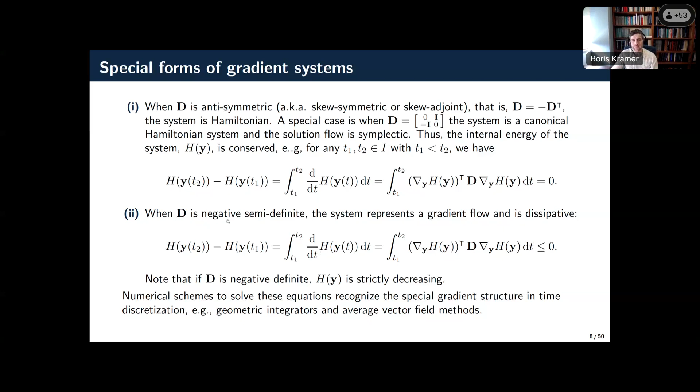If D happens to be negative semi-definite or negative definite, then you have a gradient flow system, and you have a dissipation. So the energy at T2 minus the energy at T1 would be less than zero. So the system dissipates energy. In numerical schemes, if you want to do just PDE discretization, they would respect this, and we want to respect these properties in reduced order data-driven modeling.

So let's focus in this talk on canonical Hamiltonian systems, just for the purpose of the first 10 slides. In canonical systems, I can separate the state into two distinct physically interpretable quantities, the momentum and the generalized momentum. The matrix that's in front of the gradient of the Hamiltonian is the simple canonical Hamiltonian structure. It looks like the identity minus the identity on the off-diagonal. And lastly, there's a symmetry that we can often use in the full order model operators that arises from space discretization. If you're interested in other gradient systems, then you should look at this. If you're interested specifically in non-canonical Hamiltonian systems, then Anthony Gruber and Irina, who I think is on this call, have done some work in this area to do learning of these systems.

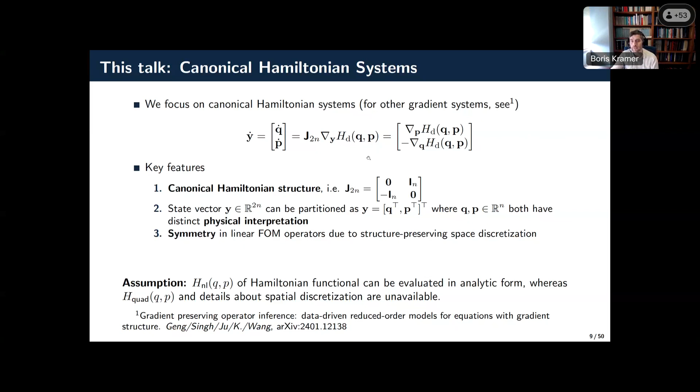So in the canonical case, I would basically like to learn a system of the top part that looks like Q dot, P dot is equal to that, but I'd like to reduce the dimensionality first. I don't want to learn in 1,000 dimensions. So to do that, I assume I have data. I store snapshots of full order simulations in the matrix Q and P just to separate these physical quantities. We'll relax assumptions as we get further into the talk. In this first part, I'm assuming that I know something about the nonlinearity in the functional. So I know something at the PDE level. I do not have to know this at the code level, but I have to know it at the PDE level. If I know this, then I can evaluate non-quadratic terms on my state.

So I can build these forcing matrices, both for a momentum and a generalized momentum. And I can also build time derivatives with, for example, a finite differencing scheme. If I have noisy data, then maybe I have to do something else, total variation differentiation or something else. But what I do here is I store data, I evaluate something that I know at the PDE level, and I compute time derivatives. Now I have to reduce my dimensionality because n could still be in the thousands or 10,000s or 100,000s. To do this, we have to be a little bit more careful.

So we want to use proper symplectic decomposition that was proposed in this paper by Peng and Mohseni in 2016. So basically, you want to make sure that the projection is onto the right space so that this projected dynamics can still be evolving in a symplectic flow. So here, the way to do this is you basically compute this phi matrix.

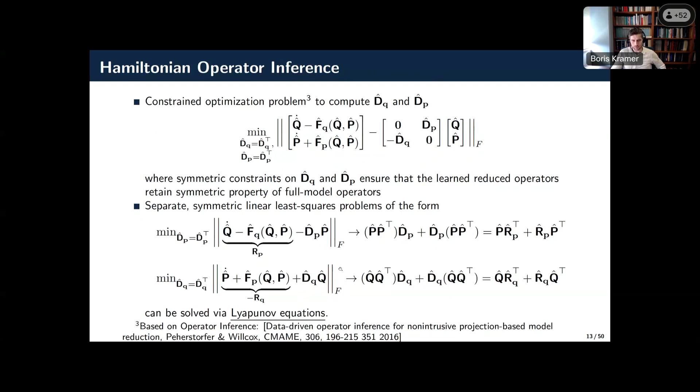Okay, so now we have a few operators, and what we basically have now is a reduced order model. We have learned these operators hat, and we have a reduced order model that evolves the reduced states with these symmetric matrices in linear terms. We studied this for a little bit in terms of what we can say.

So if you had done reduced order modeling, which is often projection based, if you had done this in a Galerkin projection framework, so you take your PDE, you discretize it in space, and you have reduced spaces that you want to project it on. So if you had done this, would the learned model from the least squares problem be close to the projected model if you had done everything intrusively?

And while it's not a result that has a pre-asymptotic error bound, at least it tells us that the operators that you get from projection, which we call tilde operators, are close to the operators that we get from learning by epsilon. So for every epsilon, you can find an R that satisfies this. The unsatisfactory thing about this result is that we don't quite know how epsilon depends on R. But anyway, asymptotically, we have this result that at least we learn the right operators.

Very recently, we also looked a little bit at the error that this implies on the solution. So if you were to solve your full order system from 0 to t, and you solve your reduced system from 0 to t, and you inject this reduced state back into the full state with your matrix phi, then you can bound this error by using some Gronwall inequalities as follows.

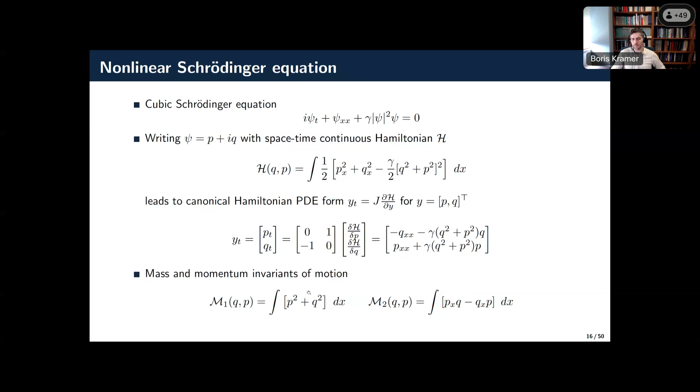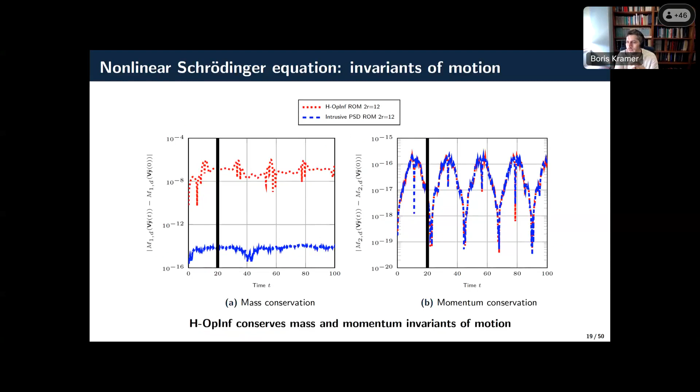So now we focus on Lagrangian models. They have structures as well. And again, methodologically, this is based on the work that Harsh has done, and then we'll see several extensions and actually nice applications. So why is Lagrangian structure now important? Why is that something we should focus on?

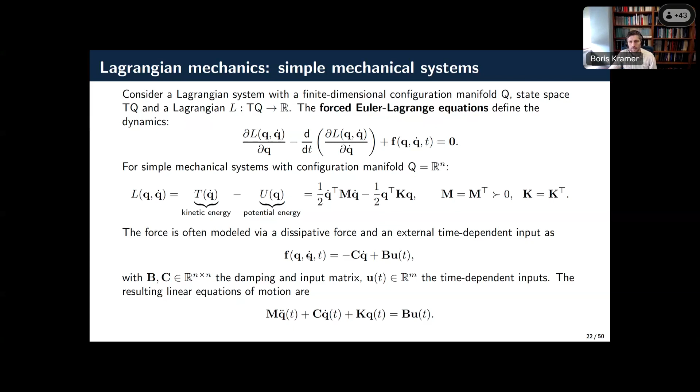I can expand and also use this Euler-Lagrange principle to look at nonlinear wave equations. So now I'm going one level up, so I'll go to the PDE. So what if I have a wave type equation? So second order in time, one-dimensional in space, where I have some nonlinear terms.

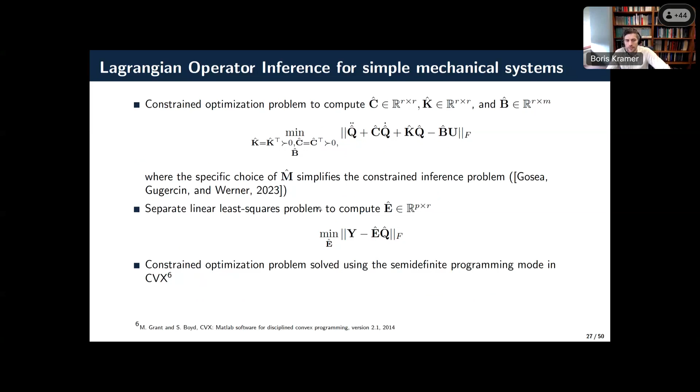And now we're moving pretty much like before. We set up a constrained optimization problem where we have constraints on K and C to be symmetric positive definite. And things that we have pre-computed and obtained from the data are Q double dot, Q dot, Q, and U. We know what inputs we have. And then lastly, we could learn the output matrix E hat if we wanted to. We solve these things with the CVX toolbox. So we minimize this problem under constraints.

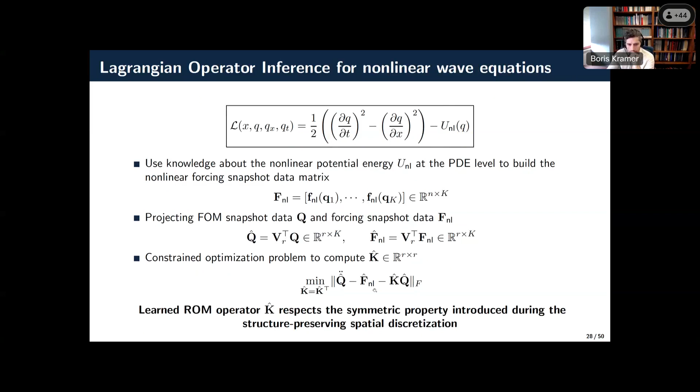If you want to push it to a nonlinear wave equation, so if you want to add some nonlinearity here, then at this point, again, we'll relax this at the next level. We would have to know this component of potential energy at the PDE level. If we do this, then we can evaluate that nonlinearity at the state. We make the same projection, and we solve our optimization problem again. We'll see some results for this later. Importantly, I think really the symmetry and positive definiteness is what gives us long-term predictive accuracy.

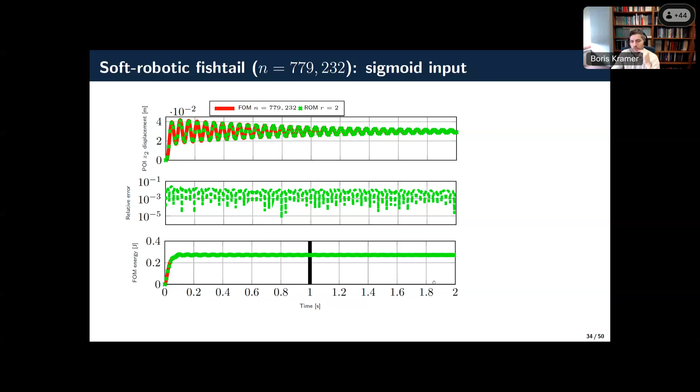We have this displacement, and we show it for the high dimensional problem, and we show it for a reduced order model of dimension 2. That's pretty good. Other people have also worked, a group of Peter Benner, Stefan Werner has worked on this with different reduced order models. This is a nicely reducible problem. Relative errors are low, and the energy, most importantly, here we train for 1 second, extrapolated 2. You see the energy doesn't change anymore because we have a nicely predictive model.

Now we use a step input. So this is a control in. So we trained it with a sigmoid. Now we tested with a step. They have very different characteristics and frequencies that they excite. So even for different inputs, this works pretty well.

We now see the step response of the full order model and of the two different reduced order models, intrusive and non-intrusive. The displacement errors are probably better here to see than to compare all these circles and dots. And lastly, the FOM energy in both cases remains very nice and stable. So no energy growth or anything.

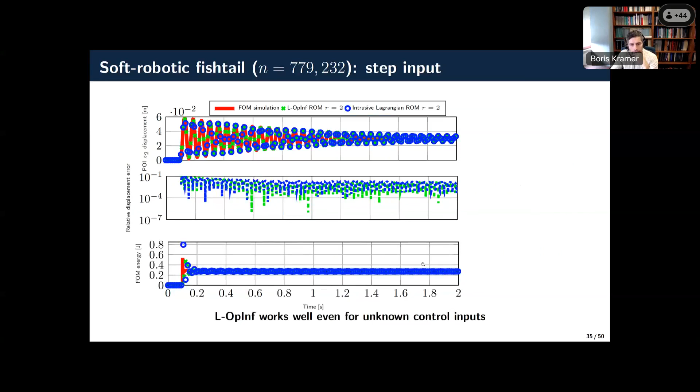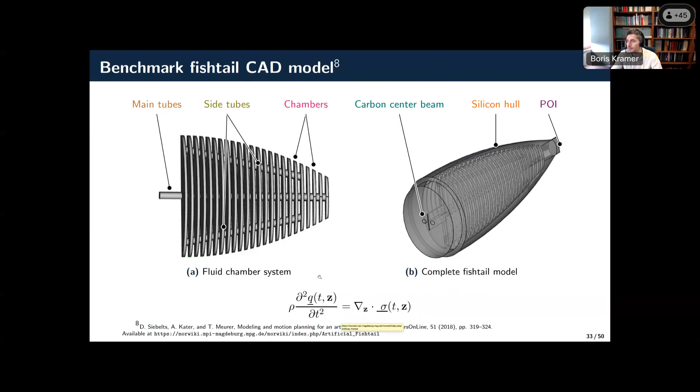Okay, so that was our benchmark problem. And by the way, you can download it. This is really nice. Peter Benner's group has the MORwiki up, so you can download this model if you want to and play around with whatever method you have. Okay, so this was a benchmark model. And then some of our colleagues here in the robotics group at UCSD got interested in this, and so now I'm just showing you 5 slides or so about actually building something like this here at UCSD.

So here I have some videos. I hope they're playing. Youngsoo assured me they would be playing. On the left side, I'm showing you a video of a trout that's swimming. So this is an actual experiment where you have a water tank, you have a stream. So why do fish swim up the stream? And you have this trout swimming. So let me go. Oh, no, it doesn't. Let me see. I'll show it again.

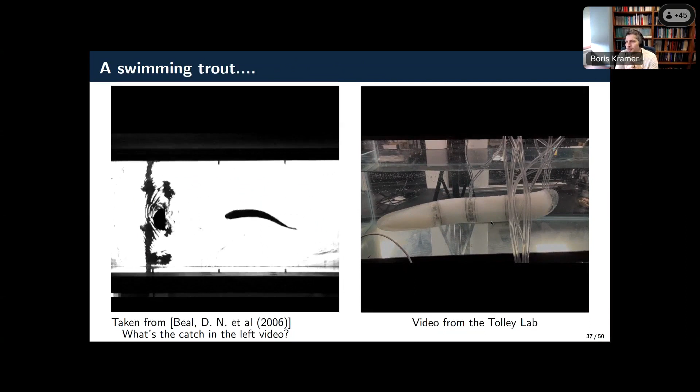So focus on the left video. Can someone tell me what's the catch of this left video? If someone has seen it, you will know it. If you haven't seen it, you won't know it. Or maybe make a guess. The fish isn't alive. The fish is not alive. Yeah, the fish is dead.

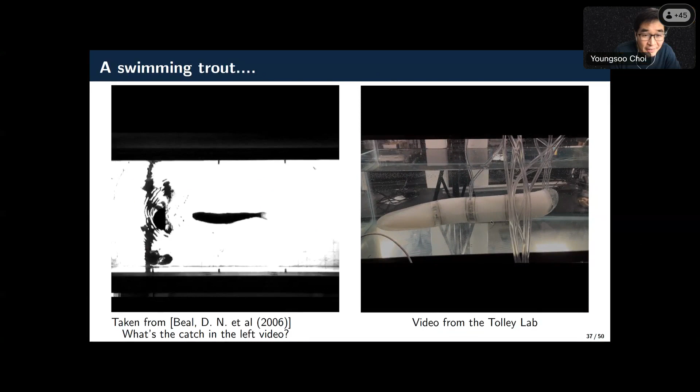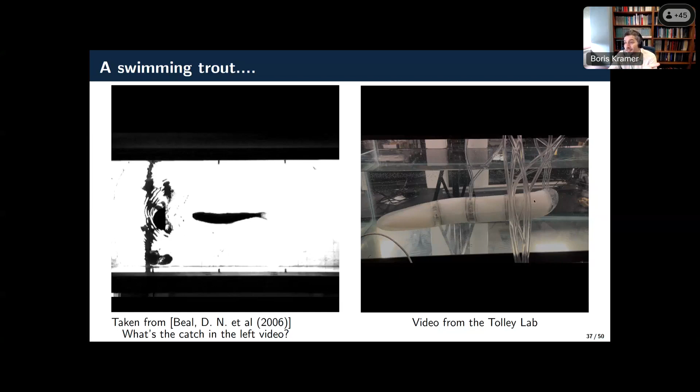Which really is interesting. They put a dead trout in there, and just the body motion and the way these fish can move allows them to swim with very low energy, like zero energy upstream. And so that's pretty impressive. Obviously, we would like to replicate this in engineering. So on the right side, you see a video that actually is from our collaborators here at UCSD, one building over. They built this soft robot.

They actuated it with these kind of pneumatic chambers where they put in pressures. So these are the control signals that you have. So you have 1, 2, 3, 4, 5, 6 control signals, I believe. Yeah, 6 controls that you can actuate. And you see this thing on the right-hand side is basically moving. Okay, so that's good. So they want to actuate this thing.

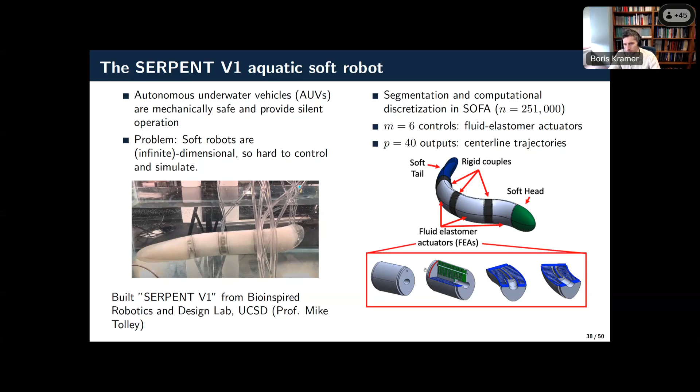This is a soft robot, so it's a continuum model. There's a discretization software that's a little tricky to use, but we've used 250,000 dimensions. The nice thing is this is typically segmented, so they produce individual segments and kind of patch them together. It's 6 controls, which are these fluid elastomer actuators. They also change the actuators all the time to get better performance, and the outputs are the centerline trajectories. And so basically this is how this looks inside the finite element model.

So now what they want to do is a control loop where you have a control policy that could be nonlinear. So it's a model predictive control, basically, MPC, that goes into your robot. Your robot is fully nonlinear. You have an output measurement model, which are the 40 points along the center line. And then you need a state estimator. So from the output, you need to re-estimate the state, and the state goes back into control. That's a classic control loop.

This state estimation has to happen in real time for this robot. So that's where we want to do a reduced order model. This is a simple state estimator. I mean, controls people love linear problems. So this is why our operator inference method here will look at learning a linear state estimation model so that they can use it in control.

And again, they wrote it as a first order. I mean, this is a time stepping. We kind of did like a second order system here to get this discrete time system. They ran it, and one of the things they found here, so they compared, they got a state estimation, they did a control policy, and then they kind of actuated this robot.

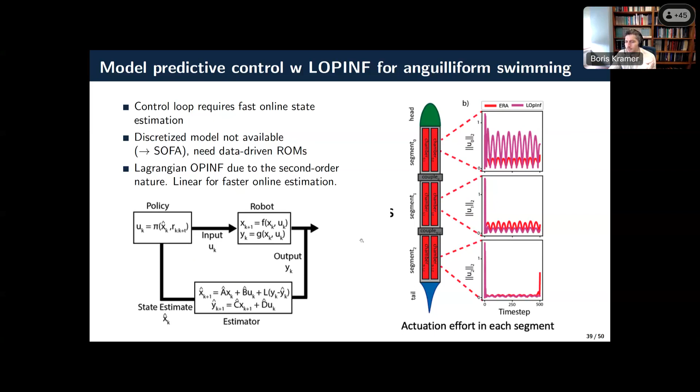One of the things that they found in simulation is a way to control this. So they control individual chambers separately, and they found that the top segment has to be actuated the heaviest, and the tail segment has to be actuated the least. And here's the actuation signals that would come out if you use the norm of the controls, if you use certain different methods to build your state estimator. I'll talk about this later.

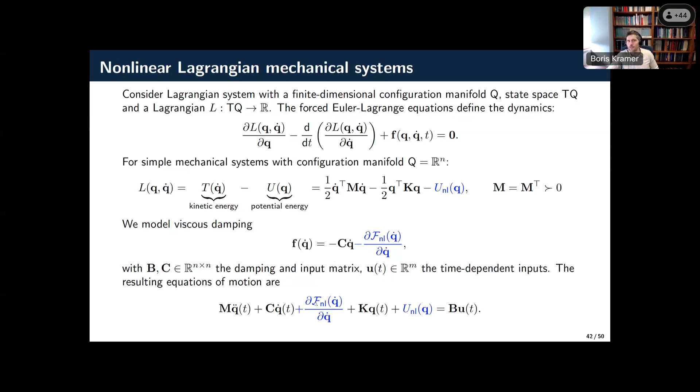I have a more general viscous damping than I allow myself here as well. So there could be other damping terms that are not just linear. And ultimately, I would come up with this Lagrangian system here that now has highlighted in blue things that we, in collaboration with our structural engineering colleagues, have added to this framework. So we don't have to rely on linearity. Again, linearity seemed to be fine for the robots. It wasn't fine for the nonlinear vibrational tests that the structural engineers were looking at.

Okay, so our optimization problem now becomes a little bit harder. It's not just optimizing over linear constrained operators anymore, so not optimizing over M, C, and K, but we also have to optimize over these functions now.

So we would like to find out which functions we need there. We split this up into 2 things. The first part is we just learn the linear parts. So we learn the linear part of this problem, C and K. And in the second step, we learn the nonlinear perturbations of that problem, okay? And that's where we use some structure preserving machine learning to learn the dissipation function and the reduced potential energy functions.

So now you have to parameterize the problem, of course. You can't learn over functions. You have to parameterize the function. So we choose a neural network representation, which uses these multi-layer perceptrons that David felt were a good way to use, but we want to augment them with polynomials too. Oftentimes you have polynomial nonlinearity. So if that's the case, you're doing a polynomial regression here, just of higher order.

With operator inference, we learn linear. With this, we would learn up to, I think, 4th order polynomials. And if the nonlinearity is still different from that, then these MLPs kick in. You can make this 8th order if you wanted to, but so we parameterize this problem. Obviously, now there's a lot of free parameters we have to learn, these alphas, the lambdas, the gammas.

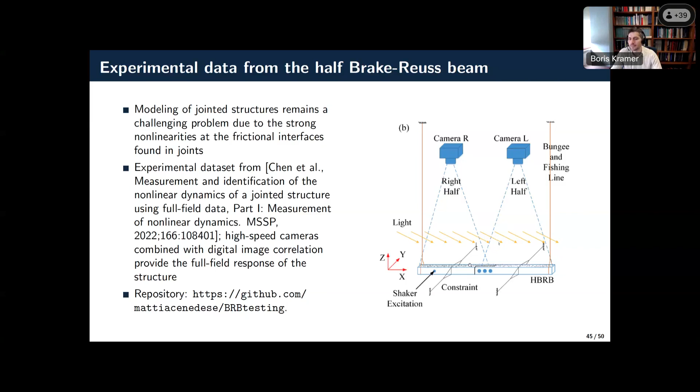So these cameras give you digital image correlation measurements because there are sensors on top, kind of like reflectors, so you can measure things on this beam, and you get this nice data set. But at the same time, it's a beam, so it's vibrating in 2nd order, so we can incorporate that.

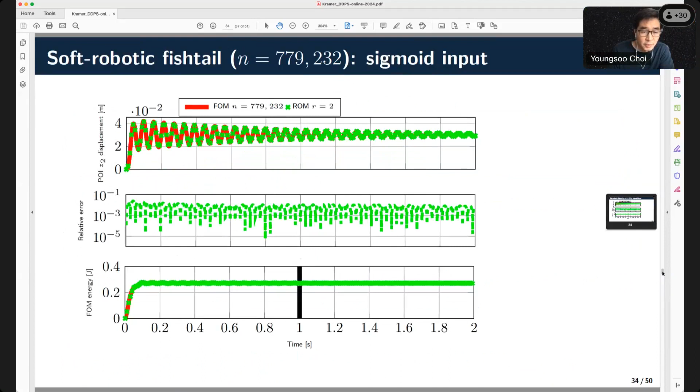Right. One of the problems was solving the nonlinear Schrödinger equations, and the first-principles molecular dynamics people actually simplified and came up with DFT, density functional theory, and they solve it. I guess there is a connection between the Schrödinger equations and molecular dynamics. Maybe there is something here it can propagate to. Could be, yeah. And it's certainly an area that needs it in terms of dimensionality reduction. And there structure preserving is really important, so definitely there is a connection.

So maybe I can ask questions. You talked about the polynomial augmentations close to the end, and you tried up to the fourth order. I guess you probably tried lower order or higher order, and then added the neural net. Was that right? Yeah, basically. I mean, I think we stopped.

Obviously, the higher order you make it, the more parameters you get to learn. So there's a trade-off between going to 10th order and learning thousands of parameters or keeping it at fourth order. There was some Pareto curve, I presume, that we had seen there that we felt p equal to 4 is a good thing. But I don't have the data at the moment. I would have to ask David, who did that work, why p should be equal to 4.